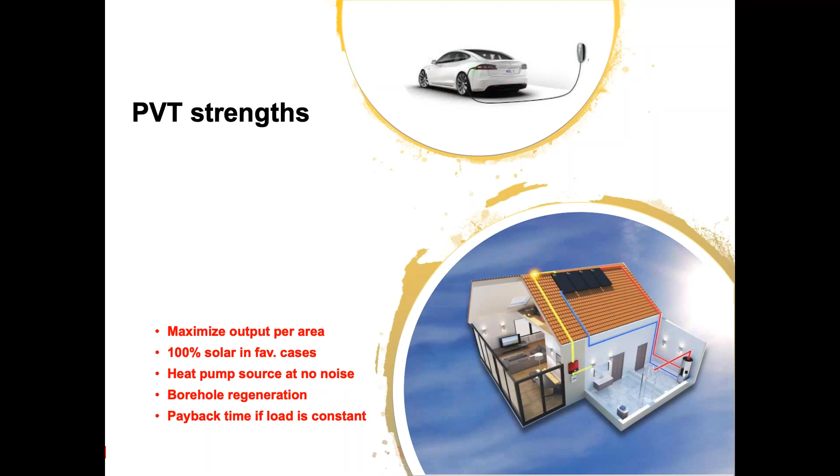What we think is our strength is that you maximize the output per area of your roof or your collector area. In some cases you will see you get 100% solar because you can also run the pump with the PV part of the solar collectors. If you use a heat pump together with PVT, it's a nice source because you'll have no noise and no borehole. And if you have a borehole, you can regenerate it during summertime. And of course, if the load is quite favorable, I'll show you some cases, the payback time is really impressive.

Now I'll explain a little bit what PVT is. I guess most of you know it's a hybrid technology, and we have an absorber on the bottom of the collector, and on top of it we have PV modules, which are linked to the absorber by some gluing system. You can have glass on the right hand side, you can have glass on top of it, or you can have no glass, which is called uncovered in common language - but for scientists, it's called a WISC collector.

You will have heard more than once this WISC label, which stands for Wind and Infrared Sensitive Collector. If it's not glazed, you get some action during nighttime by the ambient air on top, or the ambient air at the bottom of the collector if it's in a freestanding state.

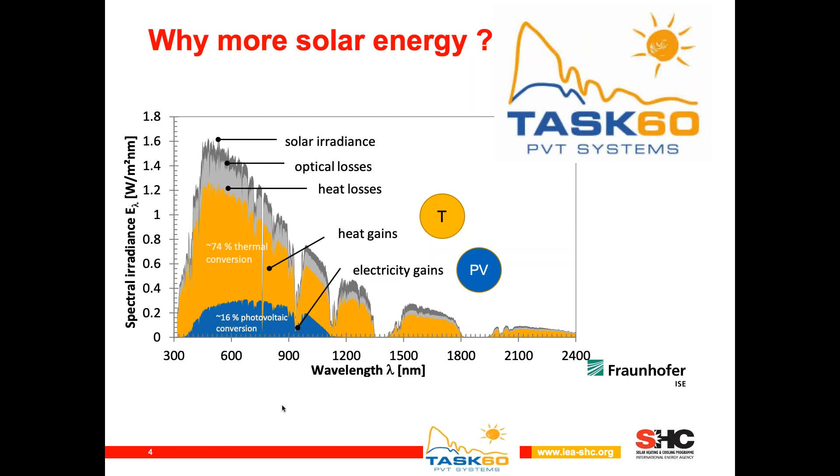You see here why the Task 60 logo was designed like this. The yellow part is what the thermal collector is going to convert - the light from the sun converted by the thermal absorber - and the blue one is what the PV cells are going to convert. So if you add the yellow and blue spectrum, it's a larger spectrum than if you were only on the yellow or separately on the blue spectrum. That's why we get more solar energy out of a PVT module than out of each of the modules separately.

We have factors affecting the performance of both the PV and the thermal collector. Let me simplify this. First, there's tau alpha, the transmittance and absorbance of the collector, which reduces the thermal efficiency a little bit. Second, there's the heat removal factor, the way heat is moved from the PV cell, the absorber, down to the metal sheet and into the fluid. It's a little less efficient than a normal thermal collector, so you get a negative effect there too.

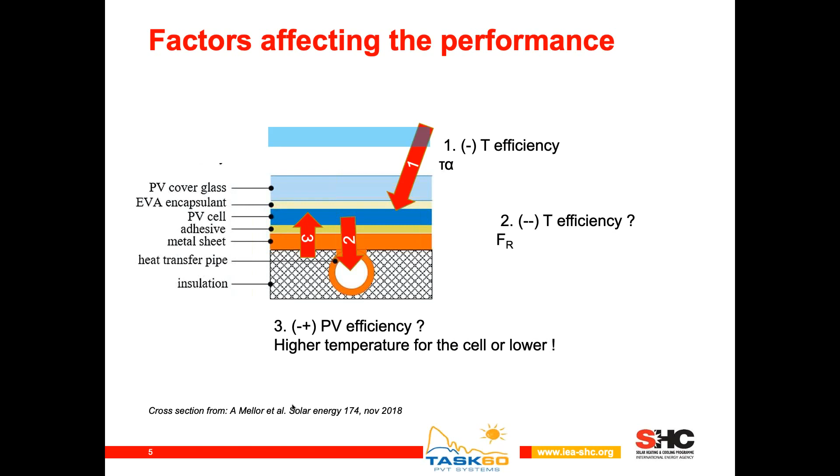The third effect is on the PV cell and PV module itself. If you have a higher temperature below the PV cell, most cells will perform a little worse. But on the other hand, if you have a lower temperature, which we can achieve with PVT in some cases, mainly with heat pumps, you get a bit more efficiency than without. Let's look at this comparison.

On the left-hand side, you have 29 square meters of thermal and 13 square meters of PV. On the right-hand side, we compare that to 42 square meters of a PVT collector. The heat would be about the same, 22 megawatt hours for the separate case and 22 for the other case, because with PVT we have more square meters but a little less performance per square meter. You see 759 compared to 524 kilowatt hours per square meter for the thermal part.

Electricity will be much higher because we get 42 square meters of PV without any noticeable reduction compared to 13 square meters. So if you add all the energies together, you get 13% more from the same roof area. Also notice that on the right-hand side for PVT, the electricity to heat ratio in this particular example is 1 to 3.8. I'll come back to that in a moment on the diagram, to give you this figure in mind, the relationship between electricity and heat in a PVT collector.

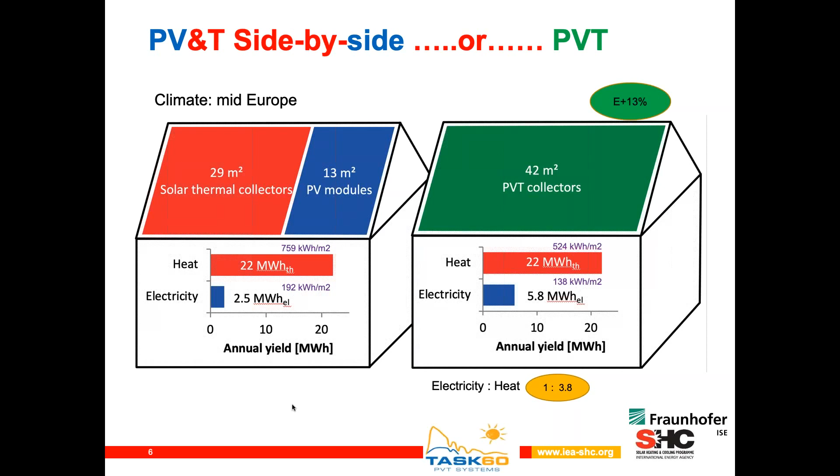Now we look at the cost problem. I'll go straight into it because I'm sure you'll have many questions. For standalone components, the current average cost over Europe, I'd say, is: a glazed thermal collector is about 250 euros per square meter, and a PV is about 114 euros per square meter. Added up, that's 364. So if a hybrid PVT system has roughly the same productivity or energy value compared to these separate parts, then the PVT glazed collector, taking a glazed example here, should not cost more than 364.

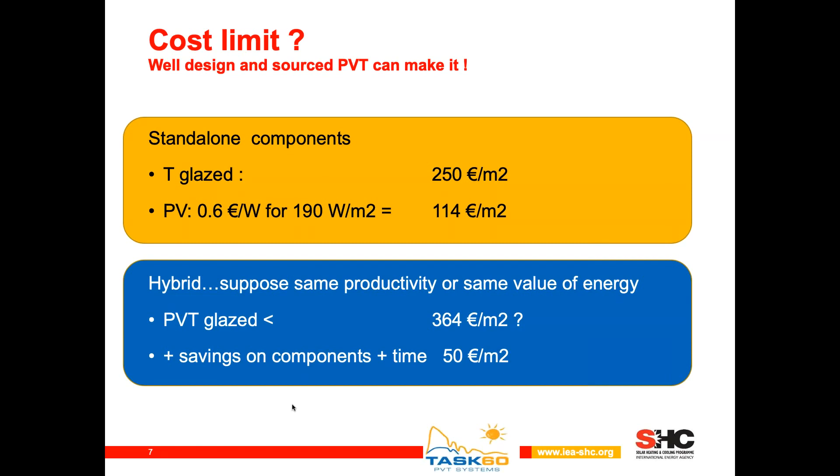And you save a little on components during installation, and also time during installation, so maybe like 50 euros more. So altogether, is the glazed PVT collector able to cost less than 414 euros per square meter? If the answer is yes, you better go PVT. And I can tell you, the answer nowadays in some countries really is yes. So PVT might really be cost competitive.

I'll give you some examples, and you'll see more from Laetitia's presentation. Here on top is a glazed collector with PV on top, and you recognize the absorber and the piping. What's strange for solar experts is seeing piping and wires together, this is typical of PVT. On the left-hand side is a very nice evacuated tube collector combined with PVT, which can reach high temperatures, more than 150 degrees Celsius. On the right-hand side is an uncovered collector with an aluminum absorber, with a traditional monocrystalline or polycrystalline module glued onto it.

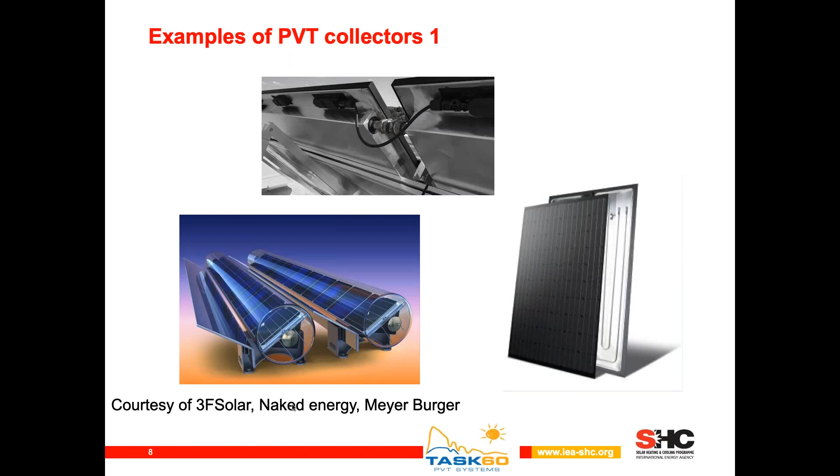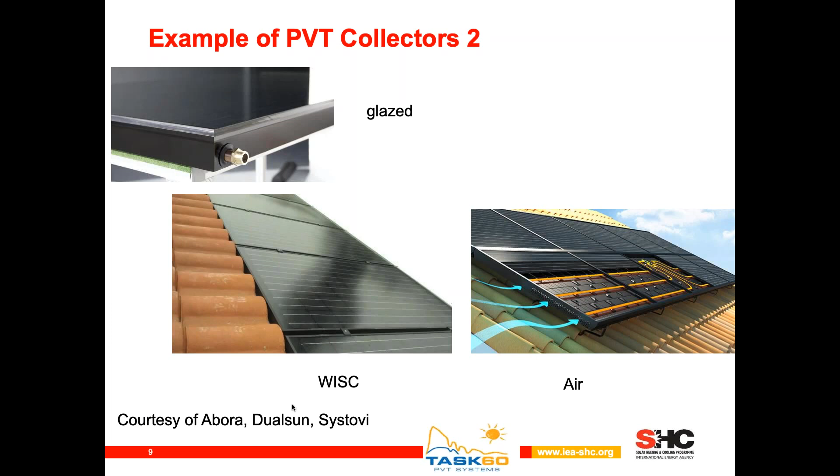Other examples here are nice unglazed collectors, you'll see lots of presentations afterwards on nice projects with these. You see it very thin, very integrated into the plane of the roof. On the right-hand side, one of the best sellers in France is the air collector, the PVT air collector, which combines an air collector with PV on top, from a nice French company.

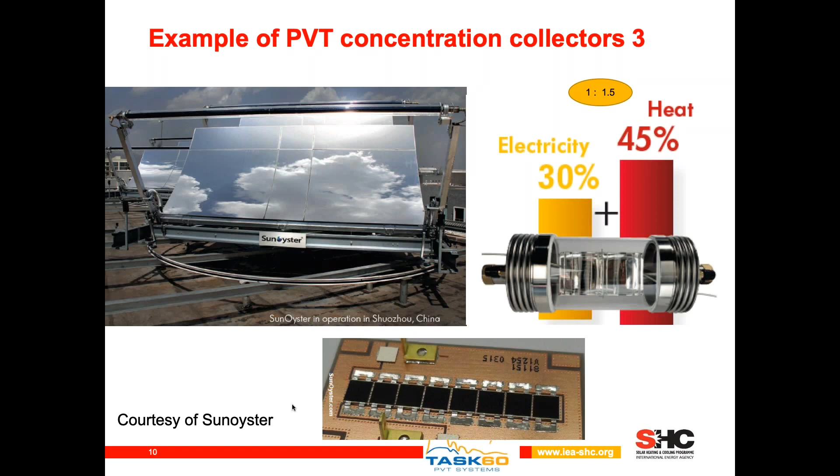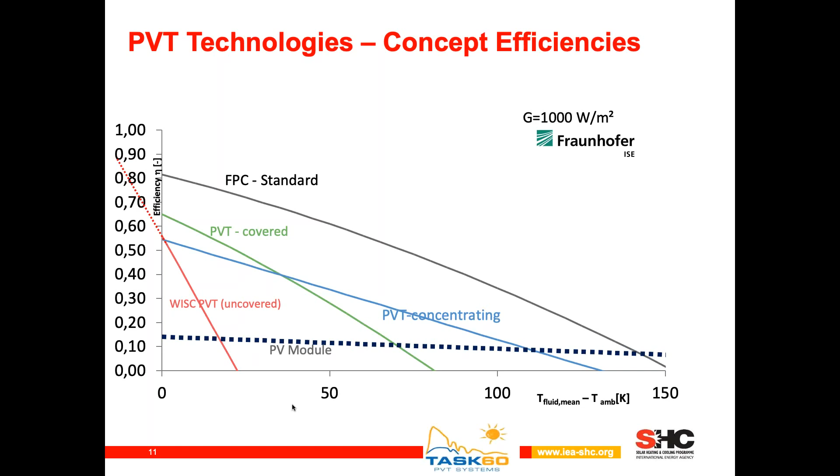Something interesting to know for PVT collectors is this: if you look at only the PV module plus the thermal part, the PVT, and find the red arrow, let's take the one in the middle, the ratio between what the PV is producing and what the T is producing is 1 to 3.8, what I said previously. It means the collector is mainly operating at about 45 degrees Celsius.

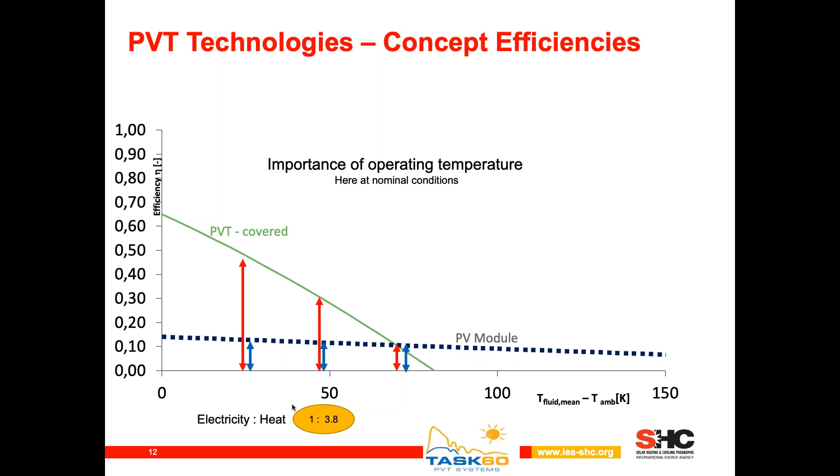The more you go to the left-hand side, the less temperature the collector will operate, and the higher the ratio will be. When you move to the right-hand side, you have a 1:1 ratio. So when you look at this ratio, you can get a real good idea of the operating temperature, the mean operating temperature of the PVT module. If the ratio is high, it's a low temperature PVT module operating. If the ratio is about the same, it's at high temperature that it happened.

So now you see the applications are quite straightforward. If you have the 3 collectors, uncovered, WISC, covered, and concentrating, depending on the temperature of the application, you get applications where the heat pump can be coupled with an uncovered collector, so to say.

And then you move to what you all know from thermal: swimming pools, a very interesting load to supply with solar, domestic hot water, space heating, and on top of it agriculture like drying and greenhouses. To the right-hand side, all the process heat applications can be fulfilled up to 120, up to 130 degrees with the evacuated tube collector. So we have a wide range of applications with this PVT technology.

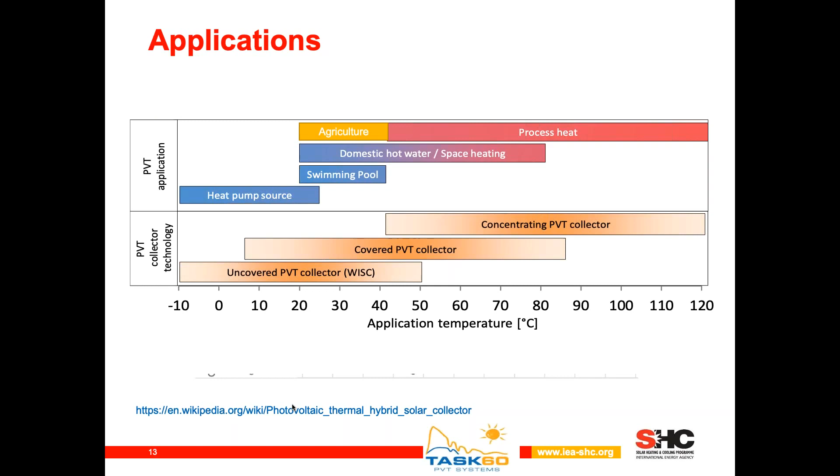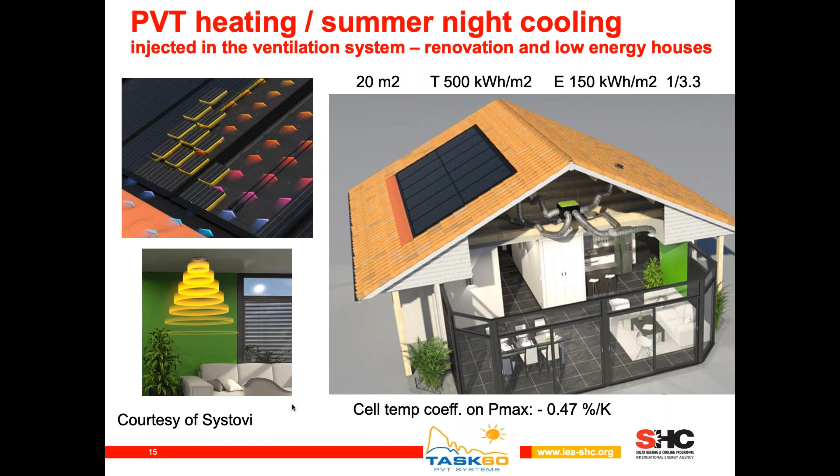I'll show you a few examples, you get more from Laetitia. This is very famous in France: very well insulated houses can be heated by air, an air heating system, and then you have air PVT collectors on top, producing in the ratio of 1 to 3.3, as noted here, so about 40 to 50 degrees Celsius, as you remember my explanations. This is the bulk of the French market nowadays, developed over the last 8 years or so, and low energy houses are keen to use that and get like 50% solar fraction with 20 square meters on the roof.

Another example comes from Spain. It's a fireman house where they have a high domestic hot water load, with 28 PVT panels. A PVT panel is quite heavy when it's glazed, like 46 kilos in this example; it's much less when it's not glazed. We have in this example 43 square meters and 7.28 kilowatts.

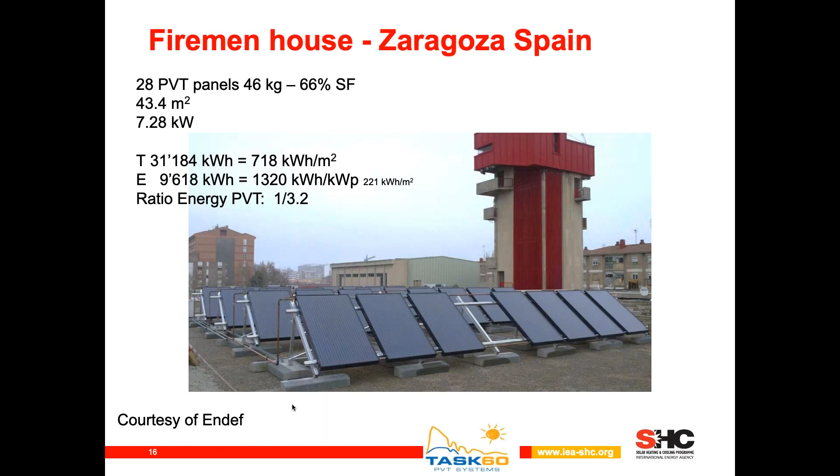And the production is quite high. Thermal, that is measured production, 718 per square meter - that is in Zaragoza, so it's a nice climate - about 50% year efficiency, a little bit less maybe. The electricity is also really interesting, 1,320 kilowatt hour per kilowatt peak, and the ratio heat to electricity is 1 to 3.2. So you see it's operating for DHW around 40 degrees Celsius, with 66% solar fraction for this installation in this fireman house.

We have also coupled PVT with ground source heat pump, and I can show you this example: 100 flats in Switzerland, with 28 boreholes of 200 meters and 1,300 square meters of uncovered PVT.

The performance after the first year of operation was such that the thermal yield was 330, which is quite good, and the electrical yield was 163, which is quite normal.

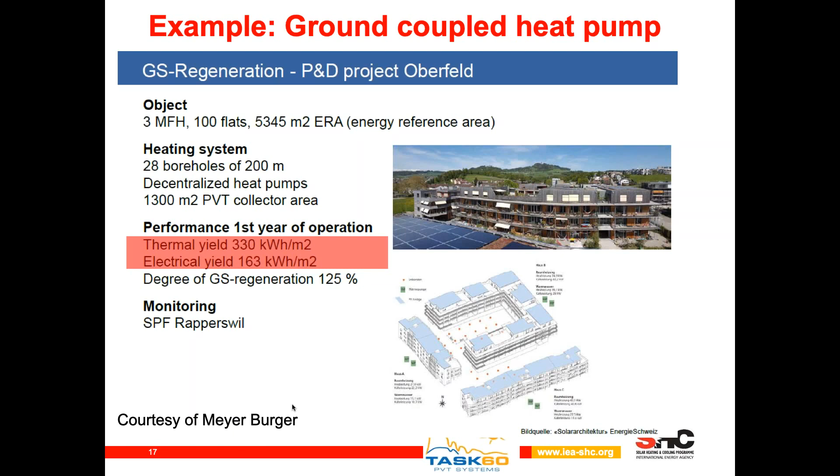The unglazed PVT collectors are used to regenerate the boreholes, because we have 28 boreholes over the land, and they are quite close together, so you need to recharge the storage a little bit, so to say, during the summertime.

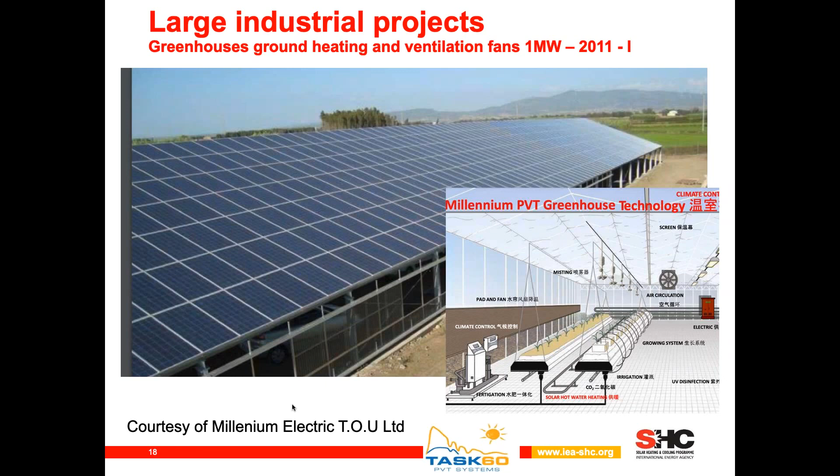Maybe the last example I'd like to show you today is large industrial projects, which can also be favored with PVT. You can operate big greenhouses like this, which need solar hot water, and also some heat at the foot of the plant, sometimes buried pipes in the ground. They also need big fans to move the air inside the greenhouse, and that can be achieved with the PV part of the PVT. There are big realizations in Israel and China, up to 1 megawatt with this PVT system.

A bit on the market, just so you understand: the uncovered water collector is dominating the market. Some covered collectors are fighting against that and taking over. Probably in the long run it will be half-half, but right now it's about 75%, three-quarters of the market with these two collectors, and the rest is distributed as you see.

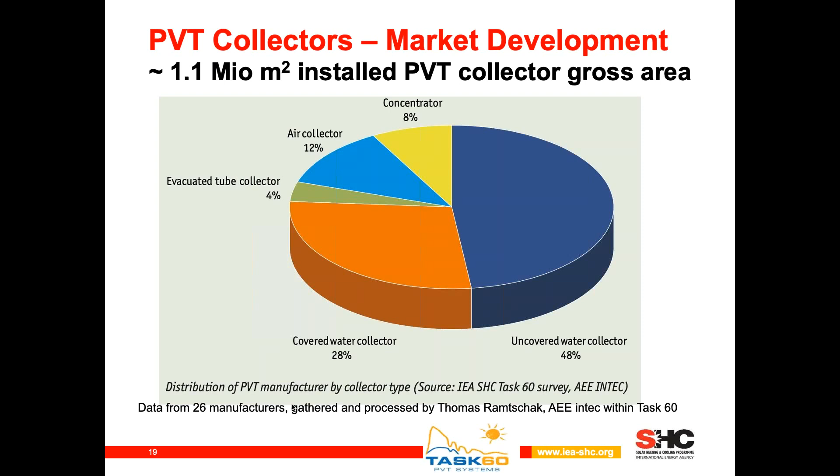We think we now have 2 million square meters of PVT installed in the world. We had a survey two years ago saying 1.1 million, and since then there has probably been some growth. It's not that much - the thermal collector market is 180 million square meters in the world. So we have less than 1%, or about 1%, but it's probably growing faster than thermal collectors.

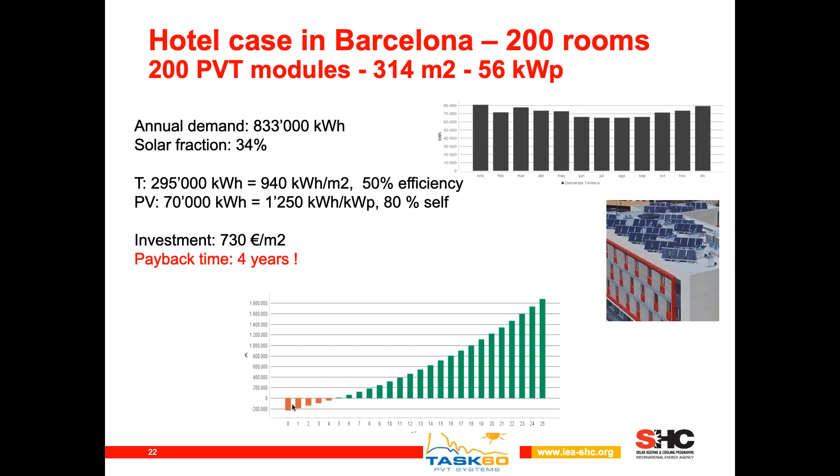You see this at the bottom: you have 4.5 years to finance, shown in red. Afterwards, the green part is the present value of the money the hotel owner gets back. If the lifetime is 25 years, he'll get more than 1,800,000 euros back from this installation. So it's a very interesting investment.

We've been doing quite a lot of work in Task 60. It's still ongoing - we have one more year to go - but we've issued a few reports you could surely get soon on our website. I'll show you a few of them. We've also opened a Wikipedia page a short time ago, where you can see what we think about PVT systems and applications on this new PVT Wikipedia page.

I will conclude with discussing rapidly the challenges we're facing with PVT. Industry is there, so we have reliable products. Models, simulation, and prediction are now done.

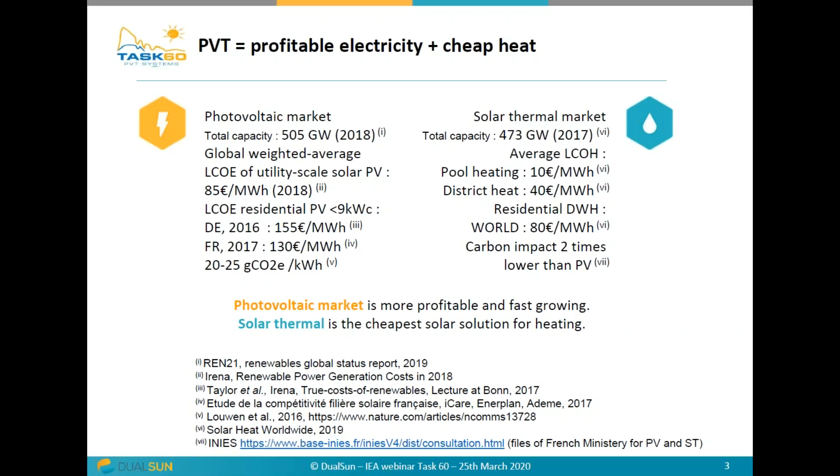Why is it interesting to consider electricity and heat at the same time? Because building and construction represent around 39% of the energy-related carbon dioxide emissions. So the World Green Building Council have launched a coordinating action toward 100% net zero carbon buildings.

by 2050. We already have in France, for example, the label positive energy and carbon reduction since last year. And we have a double constraint. We have a constraint in energy consumption that should be low, but also in the life cycle analysis of the building, we need to respect a low greenhouse gas emission.

And if you try to do this, for example, we try to do it in the H2020 project called EXCESS. We try to build some positive energy buildings and also to have a refurbishment for buildings into positive energy buildings. And the solution to achieve this goal was to use PVT with ground source heat pump.

That's really what Martin Bouygues also told us. It is his testimony here.

Bouygues Construction is one of the biggest building companies in France. And he says, one thing is certain, we will always need to produce domestic hot water, and the space on our building rooftop is not infinite. So the two-in-one technology, that means the PVT technology that combines two essential energy needs of buildings today and tomorrow, is very efficient. And he tried to use this technology for its own building and observed its excellent performance every day.

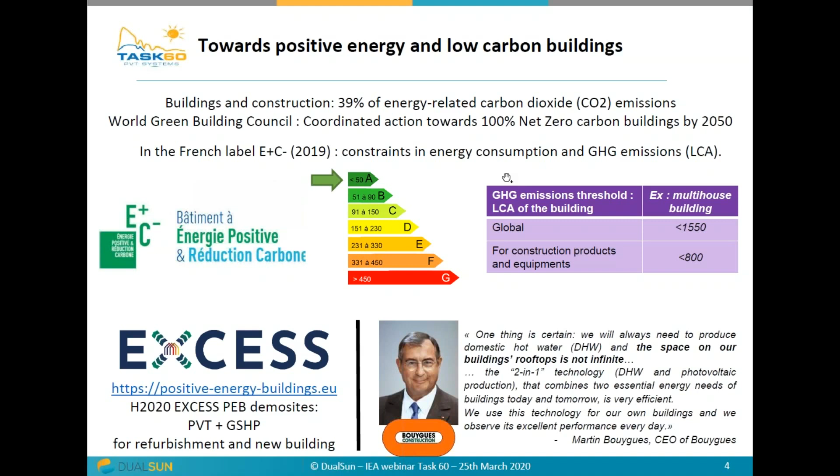About prices, you all know that the PV has a very quick learning curve. Maybe you don't know that the solar thermal also has a very quick learning curve. That's because PV doubles its total installed capacity

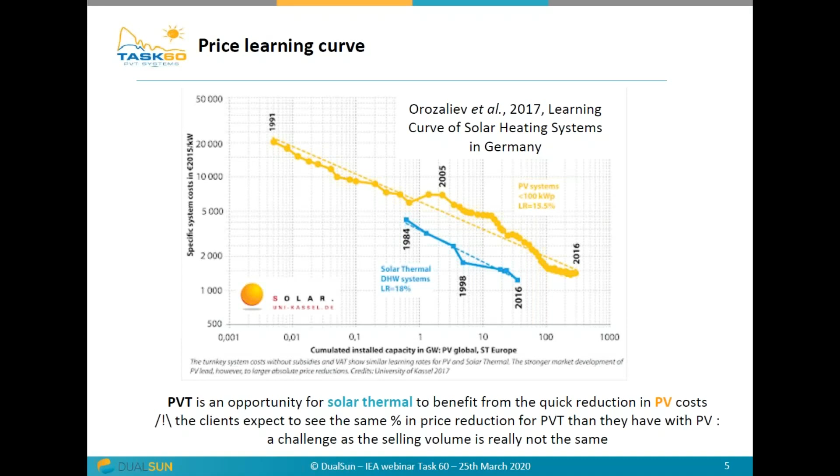quicker than solar thermal does. But I think really that PVT is an opportunity for solar thermal to benefit from the quick reduction in PV cost. But just be careful, because the clients expect to see the same percentage in price reduction for PVT as they have with PV. So it's really a challenge for the industry, as the selling volume is really not the same in PVT as in PV.

We are speaking about PVT, but Jean-Christophe has already shown us that PVT has a lot of variation. We have variations in design in all layers. You can see here the proposed layers you can find in PVT, and you can see that in the front face you can change the insulation. You have the WISC, the uncovered PVT - WISC means wind and infrared sensitive solar collector - but you can have also overglazed PVT, vacuum tube PVT, and for the PV it's the same.

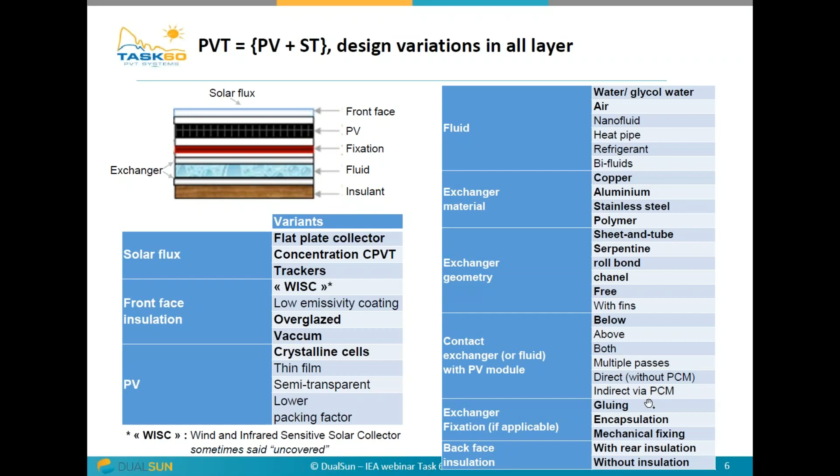You can choose many cells. For the fluid you can choose water, air and other fluids, and for the heat exchanger you have different materials, geometry, the contact between the heat exchanger and the PV module can vary, and also the fixation can be glue, encapsulation, mechanical fixing, and also for the back face insulation you can choose to not have any insulation or to have a rear insulation. And all this wide diversity in PVT concepts are already in the market.

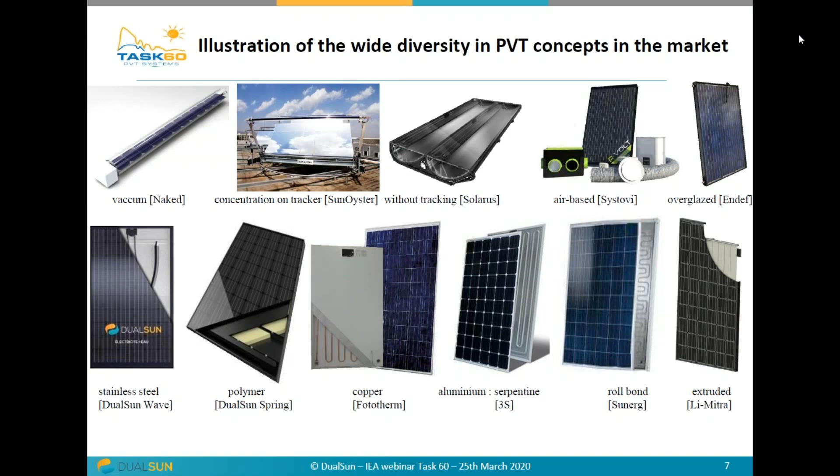You can see here a vacuum tube example, a concentrated PVT on tracker or without tracking, an air-based overglazed PVT collector. And even for WISC PVT - we will see just after that the WISC PVT, the uncovered PVT, are the most common collectors - you have a lot of materials used, for example stainless steel, polymer, copper, aluminium, and with aluminium you have a large diversity in design. You can find serpentines, roll bond, extruded aluminium.

But we have good news for this wide diversity of collectors. We already have the norm, the quality norm, to qualify the collectors. Since 2013, the Solar Keymark clearly identified how to approve a flat plate PVT. You have to pass, for the whole PVT module, the IEC for photovoltaic quality, even if your PV laminate is already certified. And also you have to pass the ISO for the solar thermal quality with the whole PVT module.

And you need to do the performance testing with the photovoltaic running in MPP mode. That means in a maximum power point of the electricity part.

Just a warning here, the aging cycle you have to pass when you pass the IEC is the same as the one you pass for a normal PV module. So you go up to 85 degrees. So if your PVT exploitation is over 85 degrees, you do not have the guarantee with the certification that the PV part of the PVT stands the cycle above 85 degrees at the exploitation temperature with no degradation of the PV performance. You need more information from your manufacturer.

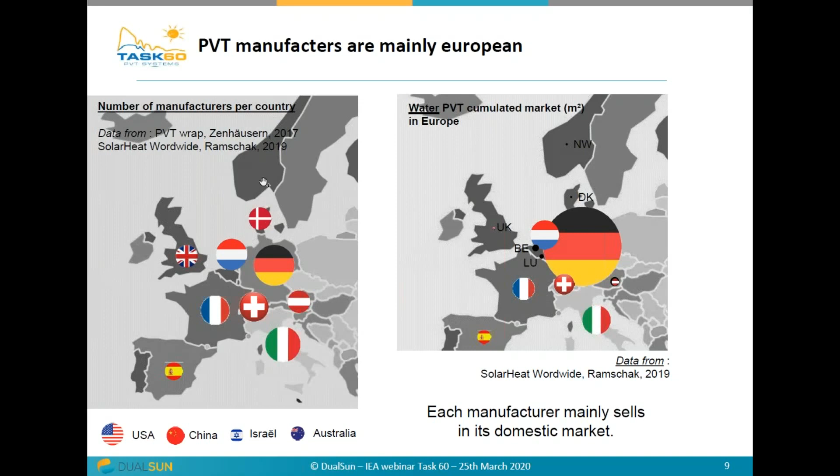We have a wide typology of clients because we can provide PVT for individual homes, multi-house owners, social housing owners, but also for health, sports, tourism. So the clients to address are very large, and also the systems that we can consider are very different.

We can go directly to preheat solar domestic hot water or pool, for example, but we can go also through a heat pump. We have three types of heat pump connection. We can go directly with the glycol to the heat pump, or we can have a storage in a tank, or a storage to the ground.

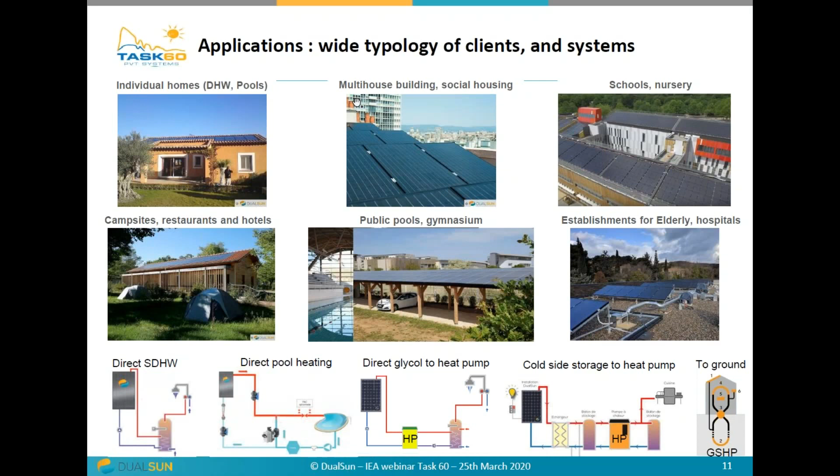And it really depends on the project. So we are more complex, I think, than PV because of this solar thermal part, and that's maybe why we have a barrier in the market today. We really have unfair support for PVT yet.

For example, when you produce exactly the same as PV plus solar thermal, I took here something classical in France: 6,000 kilowatt hours per year in electricity, plus 1,500 kilowatt hours of thermal energy per year. You can really have more support with PV plus solar thermal side by side than with PVT. And this is due to unfavorable criteria for PVT.

I think even if we have qualified professionals to install PVT, we still have less skilled people in the administration that really know PVT. For example, we are asked for the power of the PVT, but at high temperature, sometimes we don't go at high temperature, so it's not interesting to ask for this power. We are asked for a minimum of kilowatt hours per square meter, even if we can have a large area of PVT on the roof without any problem, because we have the PV to put anyway.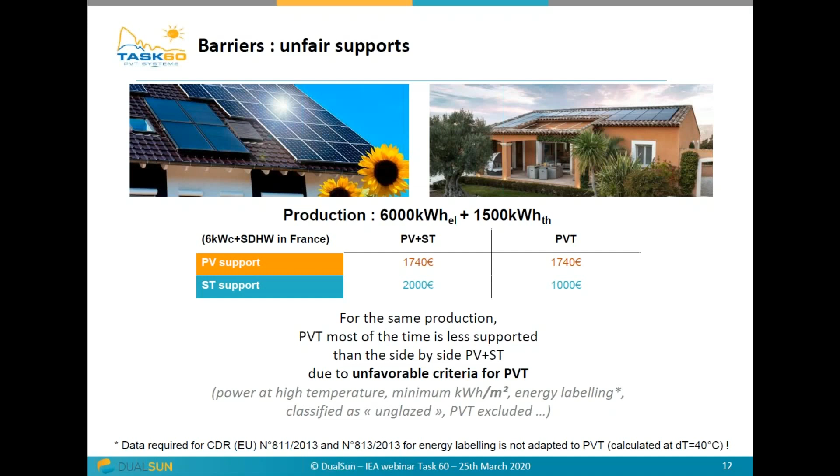So just to sum up, the strengths and opportunities PVT has: PVT is already competitive, as shown by Jean-Christophe already, competitive in comparison with PV. We already have a lot of manufacturers, more than 55 manufacturers in the market. The norms are already in place. We have thousands of successful PVT installations already running.

But as weaknesses, we have lack of awareness among prescribers, maybe because we are still a young technology. We are more complex than PV, and that maybe explains why we still have unfair public support at the moment.

But we have opportunities. As PVT, we can take advantage of PV cost. PVT is really an interesting solution for positive energy buildings and low carbon buildings. We already have many plumbers already qualified in solar heating. That's good news for us. We need them, they can deal with the complexity. And we have seen that we can have synergies with heat pumps.

As a threat, like all renewable energy, we fear fossil prices. We need high fossil prices to be interesting. And PVT is sometimes asked to follow the rhythm of PV price reduction. That could be an issue.

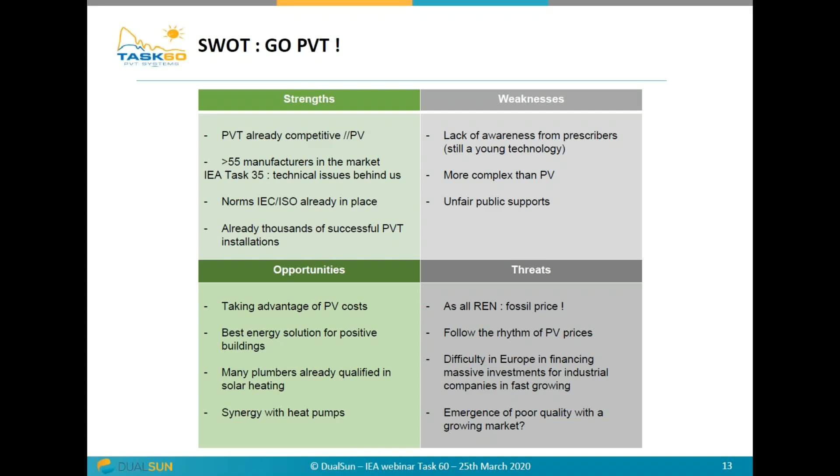If we have a booming market, maybe we can have an emergence of poor quality, but we already have norms and we already have qualifications for plumbers, so it's maybe not a big issue. So about PVT, what I remember is we have the norms, we have the plumbers qualified, we can take advantage of the PV cost. So my conclusion will be, let's go to PVT. Thank you.

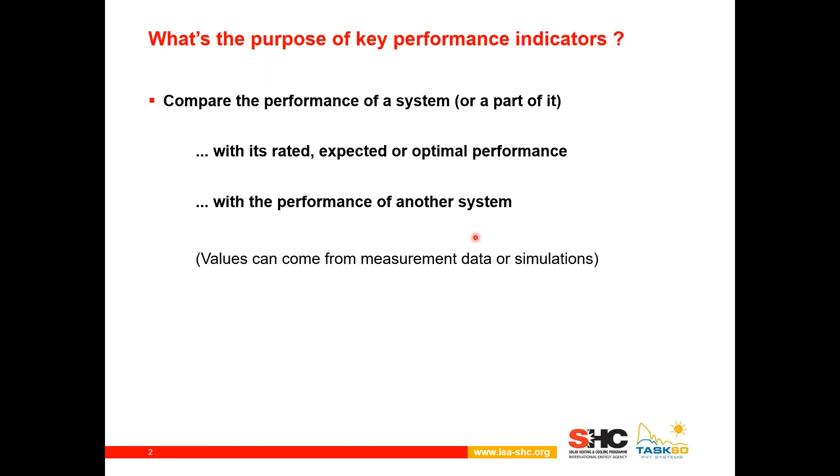Now, in task 60, we thought about what indicators could be helpful for PVT systems. The idea was not to introduce a number of new ones, or as many new ones as possible, but we wanted to also use obviously those that already are used in other domains. But yeah, so a big list came together of possible indicators, of which I will give you here just a selection, so to say, the key performance indicators.

Third, we want to have an indicator that tells us about the quality of the heat, and there we want to know something about its temperature. We would suggest to use the so-called power-weighted collector temperature. This is a weighted average of the collector temperature, weighted with the thermal output.

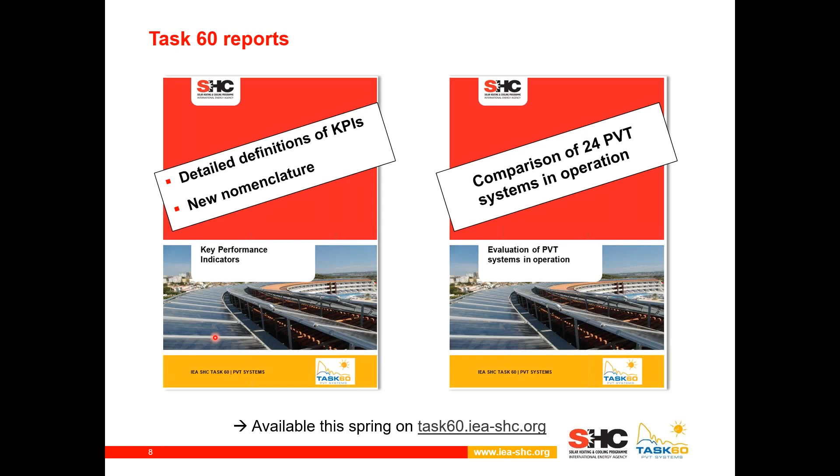Before coming to that, I want to take example one. Example one is a building complex named Sotchà in Switzerland. There we have three buildings that we look at: building A, B, and C. All are built exactly the same, orientation almost the same, but different in that they have different solar energy systems. A has a PV plant plus battery storage. B has a PVT plant, and C has a combination of PV and flat plate thermal collectors. All systems have a heat pump coupled to 5 boreholes each. In B and C, solar heat is used for borehole regeneration, domestic hot water, and space heating.

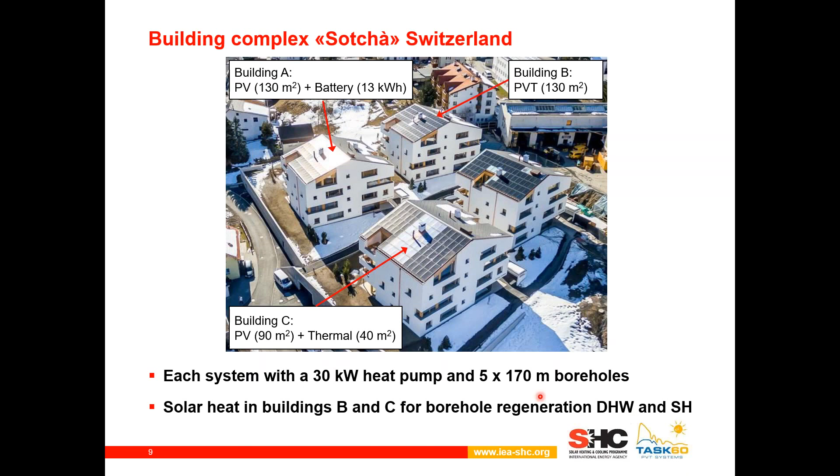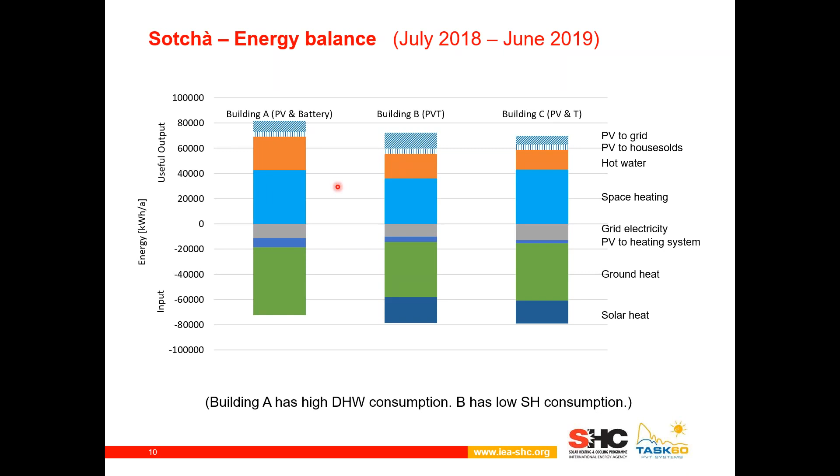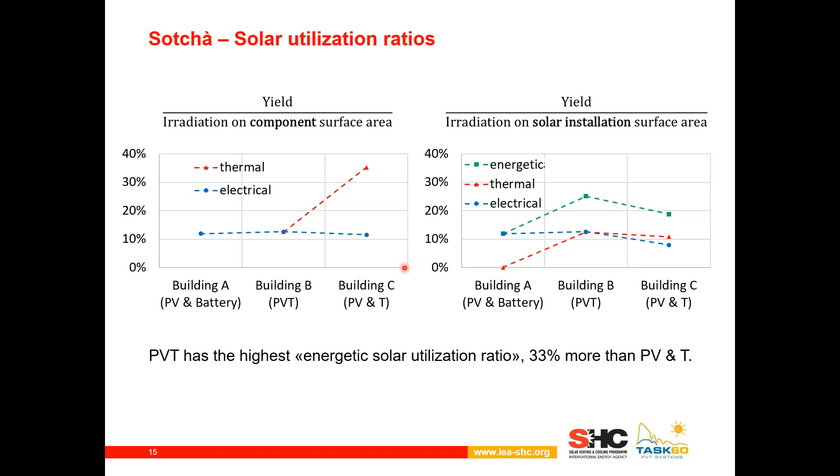Another interesting indicator in the case of a solar and heat pump system, as we have here, is the seasonal performance factor. One way to form this is to just look at the heat pump: divide the heat that the heat pump provides by the electricity it consumes.

Now, if you want to look at the whole system, not only at the heat pump, you can enlarge the system boundaries. So you divide the useful heat the system provides to the user by all electricity that the system consumes, including circulation pumps, etc.

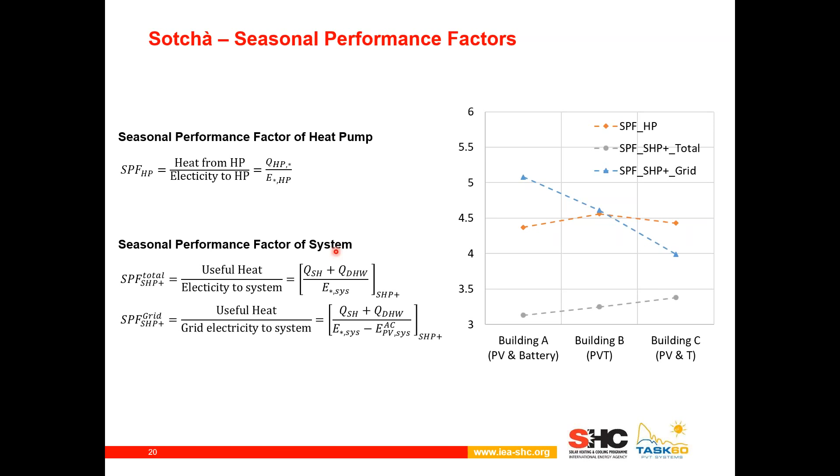So these are the things I just said, and there's a lot more to say on these Sotchà systems. I would like to refer you to a future final report, which should be published this spring, and you will be able to find it on our webpage, spf.ch.

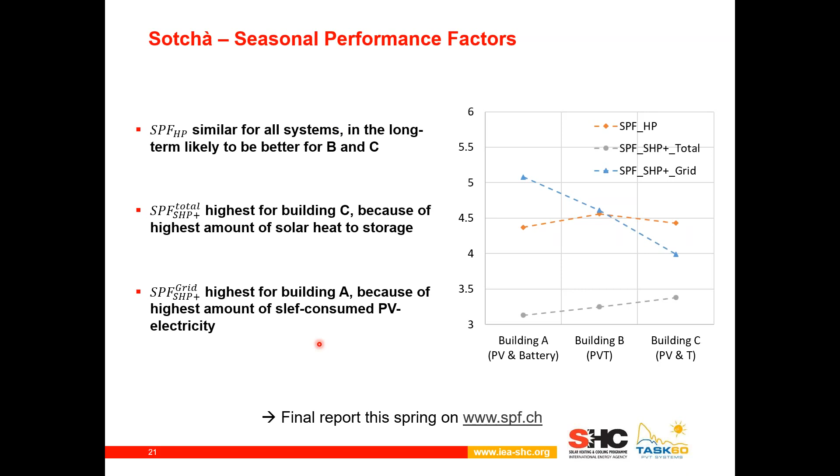Now I want to move on to the second example of application of key performance indicators. It is these 24 systems that Jean-Christophe Hadorn has mentioned that were collected in Task 60. Systems in many countries, many different applications: domestic hot water and space heating, pool heating, ground source coupled systems, etc.

We have different systems with varying collector types: covered, uncovered, concentrators, one evacuated tube, and also quite a range of different collector field areas ranging from a few square meters to 600 and more square meters.

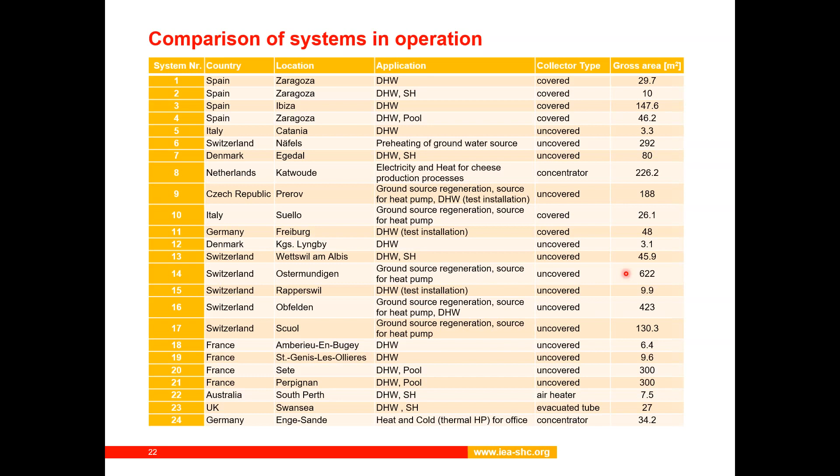Here I also want to look first at the utilization ratios, thermal in orange and electrical utilization ratio in blue. They're categorized by different heat uses. Here you can see that we have quite a spread, very varying utilization ratios.

Some of this spread is explained by different locations, different climates, etc., and also by the fact that some systems might need more optimization, some are pilot systems, etc. But still, if we take the average, we can see more than 25% thermal utilization ratio with, as I said, a large spread, and about 12% or so electrical utilization ratio.

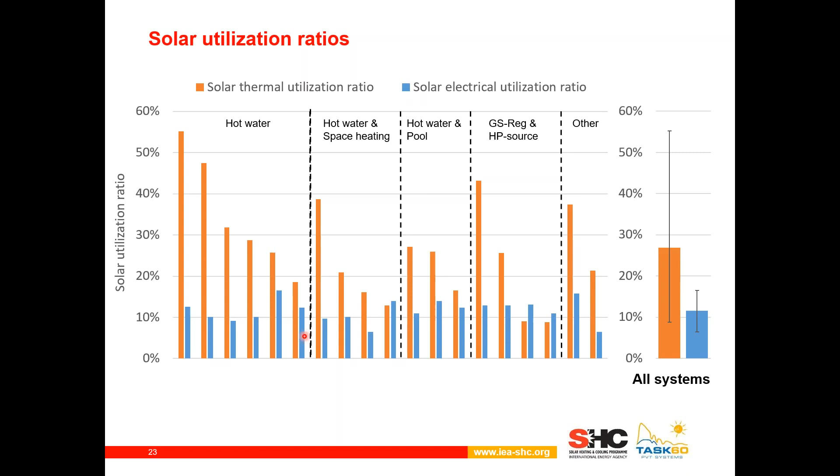Conditions of operation have an influence on these values, obviously. If you take only the systems with uncovered collectors and plot the thermal utilization ratio as a function of the collector operating temperature, another KPI, we see a rather clear trend: with higher operating temperatures, you have a lower utilization ratio, which is consistent with expectation.

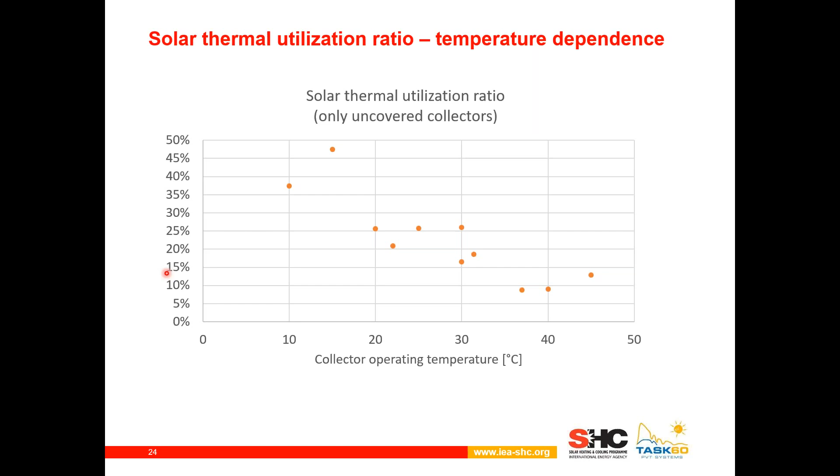Now I would like to come to a financial KPI, the specific investment cost per square meter. Here you can see there are already fewer points; we don't have the numbers for all the systems, so I only plot those that were available. Also here you can observe that, probably due to low statistics, there's not a clear trend that this would decrease with the collector field size. But with more statistics, this is very much expected.

What you can also see here is that we have a very high spread, between roughly 400 and more than 1600 euros per square meter. But the good news to keep in mind is that we really have values that are low, around 400. That's a commercial system, in the order of magnitude that Mr. Hadorn mentioned before, of 360 euros per square meter, where things would be cost competitive. I think in other cases too, things can be cost competitive, because this is often a matter of context.

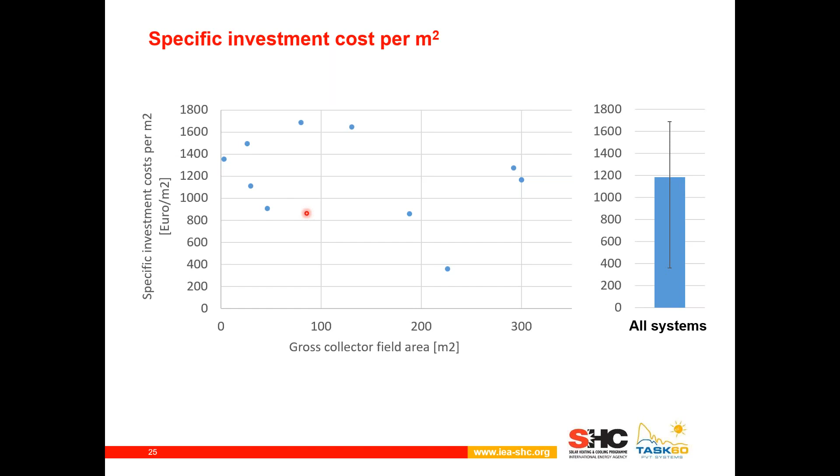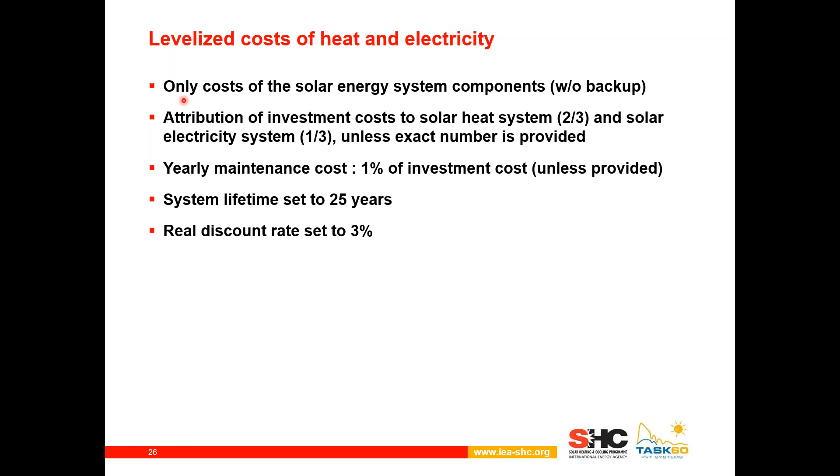Let's go on to the next indicator here: levelized costs of heat and electricity. Some background first: counted are only the costs of the solar energy system, all components, but not the backup system. We attribute the costs to the heat system by two thirds and the electricity system by one third. That's a bit of an open question in the case of PVT, how do you attribute costs. Yearly maintenance costs are taken to be 1% of the investment cost, system lifetime is 25 years, and the real discount rate is 3%.

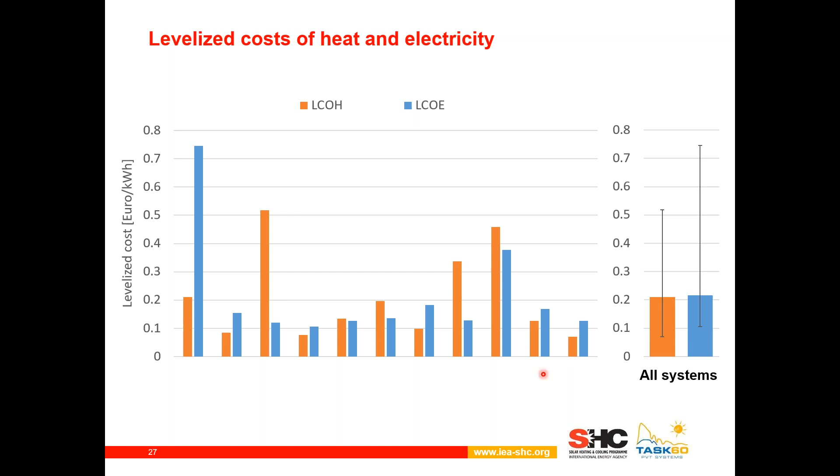With these assumptions we get the following picture, where I won't say which system is which, but you can get an idea of what values can be achieved. Again you have a high spread, but I should mention that many of these systems are pilot systems, so this can be a reason for that. But what you can see here is that it's possible to get pretty low values, around 7 euro cents for the kilowatt hour of heat, and around 11-12 euro cents per kilowatt hour of electricity, which can be very competitive values. With this I want to close and thank you for your attention, with a picture of my home office surrounded by solar plants, not PVT unfortunately.

Okay, thank you Danielle for this interesting presentation on KPIs. I have a couple of questions and I will start straight away. We have about 20 minutes left, which is good news.

I'll try to answer the first question about the list of manufacturers. We don't have a complete list of manufacturers in the world because there's no association of PVT manufacturers. We tried to have one in Task 60, but it's not complete. I guess this is a job we could try to handle before the end of the year, having this kind of list. Maybe Laetitia, you have something better than everyone else.

I know many manufacturers, but I don't think we have an official list anywhere. No, I don't think so. Maybe Solar Keymark, along the way, will have it, because the good manufacturers are going to ask for a Solar Keymark. I cannot say we have the list now. Probably we have 50% of the manufacturers, but the big ones, the ones appearing on the statistics, we have, because we've been collecting the statistics directly from those manufacturers.